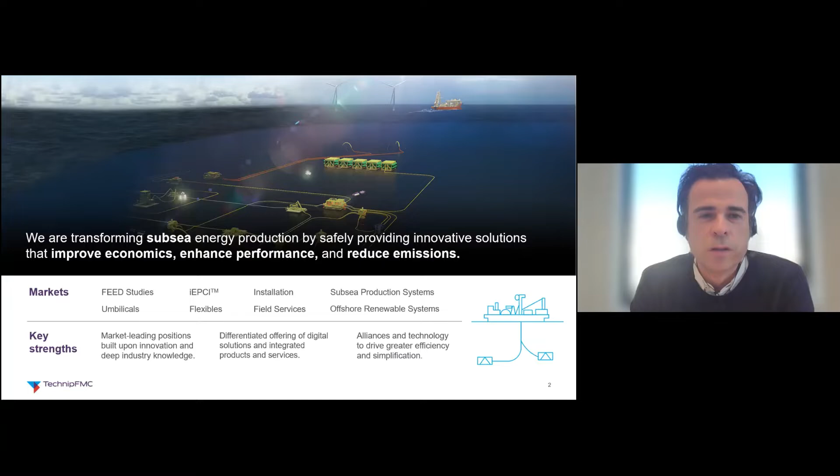TechnipFMC has been operating in subsea production systems and surface systems, providing a number of services to our customers within the oil and gas space, working as an EPCI type of supplier, so engineering, procurement, construction, and installation due to our fleet of vessels, but also performing other specific types of work within FEED studies, especially targeting SURF activities such as umbilicals and flexibles.

As we advance to the energy transition space, the strategy has landed in these 4 pillars that you are able to see here. Basically, we are utilizing our expertise as a system integrator provider, combining all the legacy technology that we have from the past and applying it to the energy transition space. We started with carbon capture and platform electrification, where we partner with our existing clients from oil and gas to decarbonize the offshore or upstream segment.

We also entered offshore wind, where we partner with developers to optimize offshore wind development. Here we play a role within EPCI, front-end engineering, systems engineering integration, offshore construction, and pipeline technology work. We established, for example, a partnership with Magnora to target the Scandinavian licensing and tendering that are ongoing. Also, within wave and tidal, there has been some partnering with Bombora and with Orbital Marine Power in order to capture some interesting developments within this space.

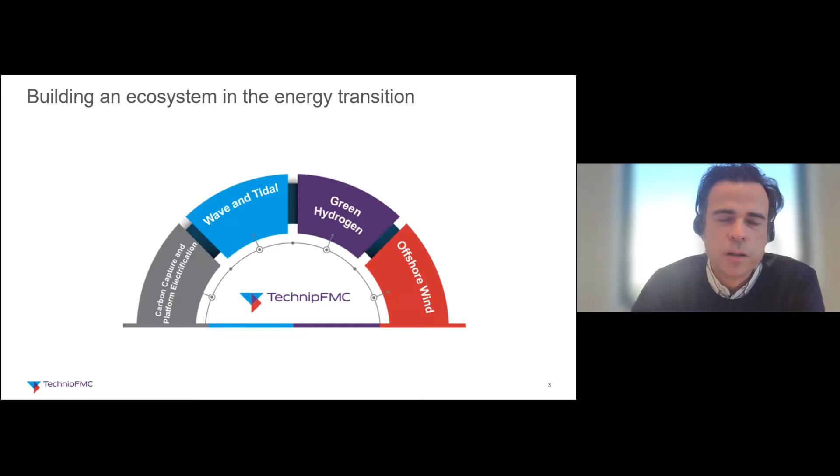But now I'll focus on the last one, green hydrogen, which is the topic for today's discussion. Basically, we are partnering with industry leaders to commercialize and develop green hydrogen through the Deep Purple concept. As most of you already know, hydrogen will play a major role as an enabler for the energy transition, and we need to tackle this enormous need going forward. In the optimistic forecast, it's expected that we will have around 24% need by 2050, and cumulative investment in renewable hydrogen in Europe alone is expected to reach 470 billion euros.

The Deep Purple system was developed by TechnipFMC with clients and key partners, using wind energy to produce and distribute green hydrogen, to provide stable power delivery, to act as local energy production, to tackle the need to reduce carbon emissions, to be competitive with cable power to shore, and to target large-scale offshore renewable hydrogen production.

I'll try to put the video on. Just let me know if there's no sound, please. Hi, Nuno. I am not hearing the sound. Okay. Let me go back then.

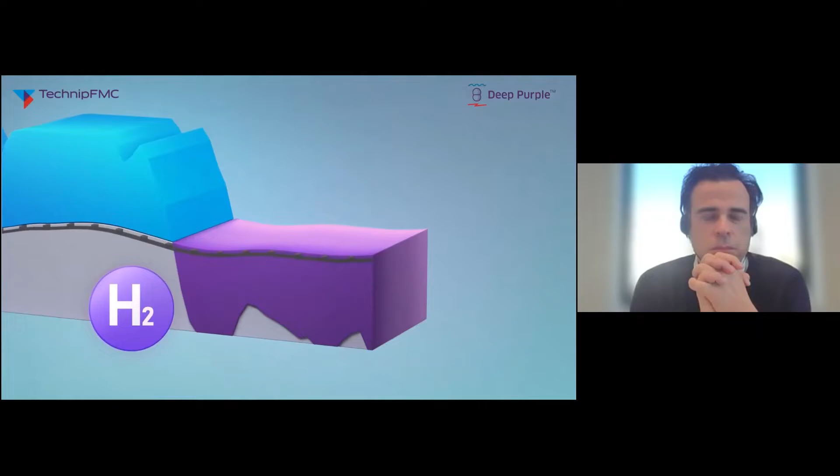The subsea hydrogen storage can be scaled according to need and can store energy volumes much larger than any existing battery. In periods with weak or no wind, hydrogen is converted back to electricity through fuel cells. Hence, electricity will also be delivered to the consumer when there is no wind. The consumer might be offshore oil and gas installations needing renewable electricity to decarbonize the operation, or remote islands not connected to the grid currently, running on fossil fuels.

The Deep Purple system can also deliver hydrogen on demand to hard-to-abate industries like steel and fertilizer plants, and the subsea storage can be used for large-scale, safe storage of hydrogen in harbours for the maritime sector. At the core of Deep Purple is the energy management system. All actions are measured and tracked to optimize the production, storage, grid stability, system utilization, maintenance, and cost of energy.

The complexity of this is high. Understanding all aspects of the system, including weather, load demands, availability targets, and equipment characteristics, is fundamental, and managing it all is required in order to deliver stable energy at the lowest cost.

So to recap here a bit, the Deep Purple concept and process. Offshore wind is intermittent in nature, and in many cases, the user needs a stable power supply for the decarbonization of their operations. So by combining the offshore wind with the hydrogen, we actually use the hydrogen as a buffer to both store and to stabilize the wind production. In the periods where we have good wind conditions, the electricity created from the wind turbines is delivered directly to the consumer. Excess power is used to produce hydrogen.

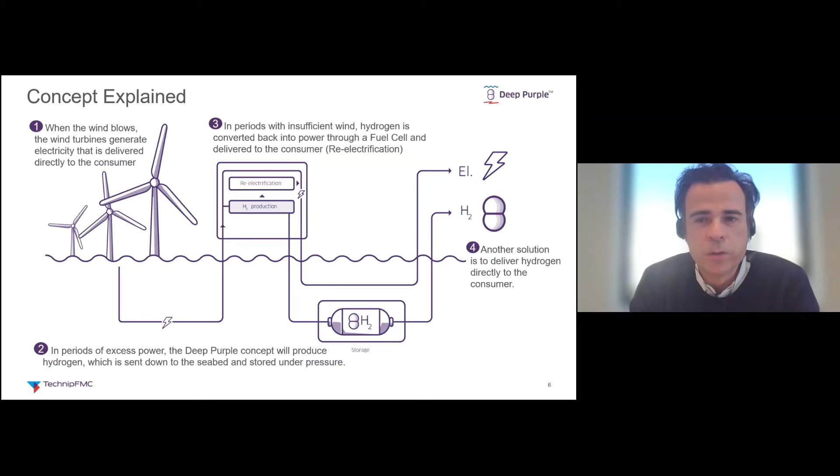Like mentioned in the video, for the potential markets that we are looking at, we see this span of ocean space. On one side, we have the off-grid energy systems, while on the other side, the large-scale hydrogen production and storage. In the off-grid energy systems, delivering renewable and stable power to traditional energy installations and remote islands. This market opportunity is primarily driven by the need for decarbonization, for example, replacing gas turbines and diesel generator sets. By combining offshore wind and hydrogen, we can enable 80 to 100% reduction in emissions.

For the offshore green hydrogen production and subsea infrastructure for coastal application, the offshore hydrogen production will enable the harvesting of wind resources far from shore, where the transport of electricity could be challenging. The hydrogen pipeline offers up to 10 times more capacity for energy transfer compared to a power cable, and our subsea storage system can be used to store large amounts of hydrogen.

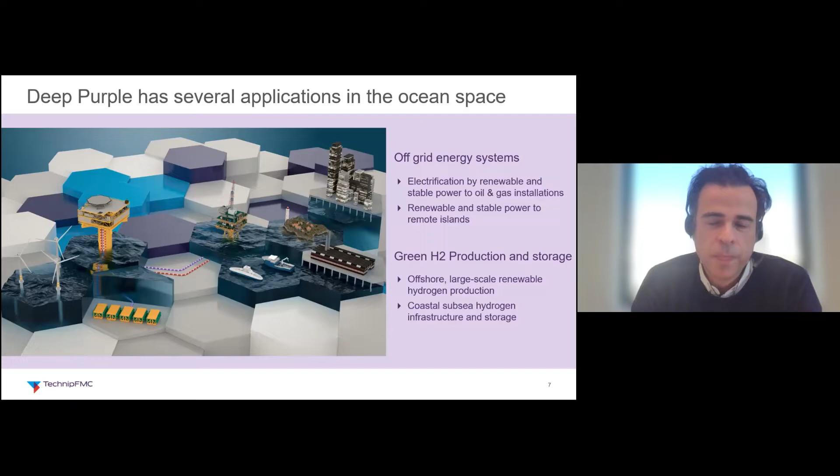For the current ongoing applications of Deep Purple, we started this year on the Deep Purple pilot, and it will continue over the next 2 years, where the project consortium will design, build, and test a physical land-based pilot at TechnipFMC's Norwegian headquarters in Kongsberg. The pilot will include an electrolyzer, hydrogen storage, a fuel cell, energy control system, as well as the development and testing of an advanced control and advisory system and dynamic process simulator.

The pilot will allow the consortium partners to ensure energy efficiency and autonomous operation offshore, as well as prepare the system for large-scale offshore commercial use. This has been the object of governmental funding, and the partners are described here, including Vattenfall, Repsol, Nel, ABB, DNV and other Norwegian partners.

Other ongoing initiative is the floating power plant, where we are working with this Danish company to develop a combined floating wave and hydrogen energy storage system. So it's a self-contained floating power station that will use hydrogen process technology to manage wind wave intermittency. So this is a decentralized type of concept, a standalone, that could capture the full system, going from the production to the storage part of it.

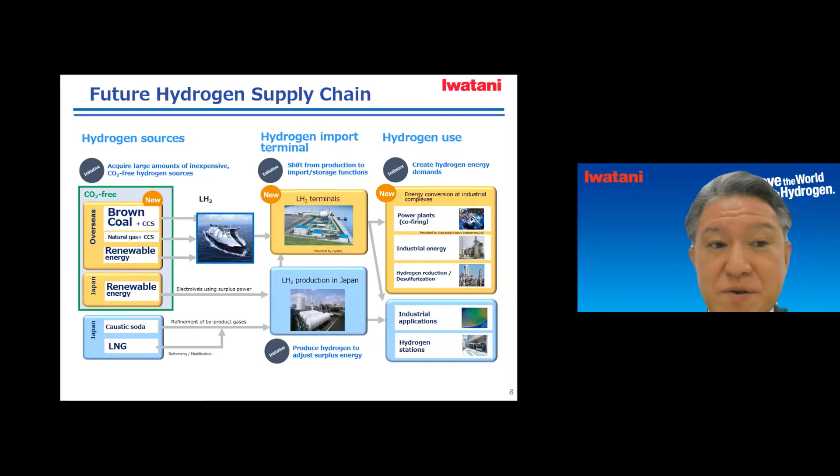So this is what we are going to do from next year, for 5 to 10 years. Currently, we are producing hydrogen from fossil fuels like LNG, but we are going to build a global supply chain of CO2-free hydrogen sources.

Currently, this is a very small-scale demonstration project funded by the Japanese government. Iwatani and Kawasaki, also Marubeni, got together for the small-scale demonstration. We have already built the special tanker ship to import the hydrogen from Australia to Japan. We also set up the tanks in Kobe in Japan for storage of the liquefied hydrogen.

And recently, Iwatani, Kawasaki Heavy and ENEOS were awarded a much larger scale demonstration for a liquefied hydrogen supply chain. The investment for the coming 10 years will be about $3 billion, and the Japanese government will support us with $2.2 billion. What we should do is build a larger scale development of liquefied hydrogen importing from overseas countries.

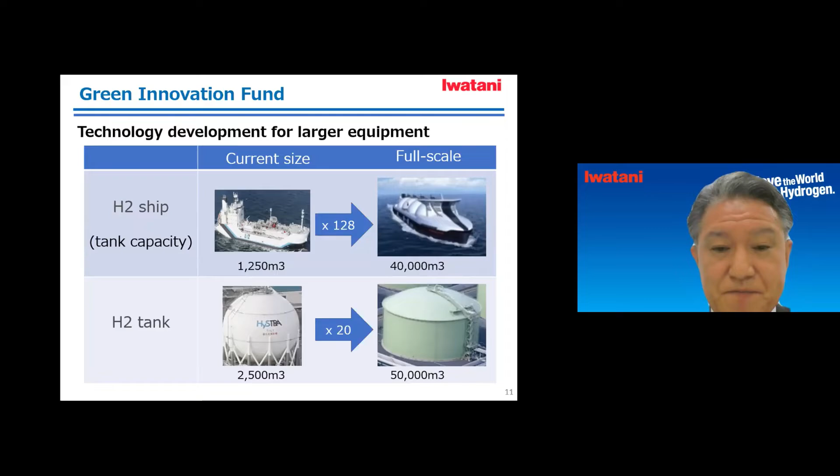Currently, as I said, we have a small-scale tanker, but for the full-scale demonstration, we need a special tanker 128 times larger than the current one. And also the storage tank in Japan should be 20 times larger than the current size. So we are now demonstrating importing from Australia, but we are going to increase the opportunity to build the global supply chain, hopefully from Portugal as well.

This is just for your reference. We are currently designing fuel cell ships, which will be operated for the Osaka Kansai Expo in 2025. So Iwatani, as a leading supplier in Japan, tries to create more demand for hydrogen. Also, we would like to build the global hydrogen supply chain, hopefully from Portugal. We expect offshore hydrogen production in Portugal, and hopefully we would like to explore more opportunities to import hydrogen from Portugal to Japan in the future.

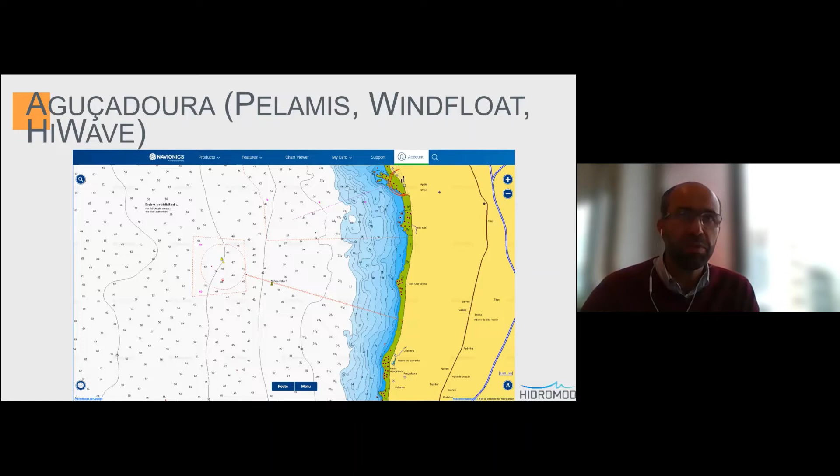I've gathered a few things, mostly based on these two sites that were already referred in some of the presentations. So the site of Viana do Castelo, where the WindFloat Atlantic is based, and the site of Aguçadora, where now we will have the HiWave from CorPower, but previously there were other projects on this site. So our main concern is how do we get the right data to the right people in the right time, to the people that are involved in these sites. How do they get their data? How do we share data to other people that want to study opportunities in these sites? So how do we do this?

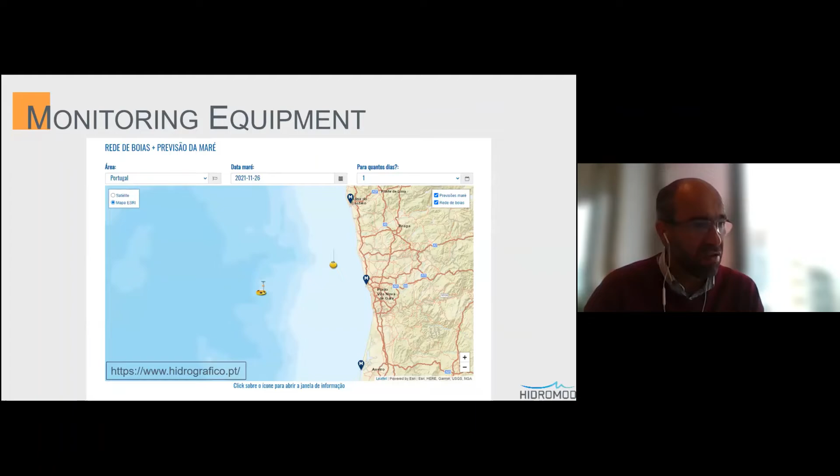There are a number of equipment there, and there has been a number of equipment in that area for a few years now, and this specific equipment I'm showing here is there due to the Instituto Hidrográfico. So they maintain a host of equipments there in the sea and on land. So tide gauges, wave buoys, and it is very important that this data gets through to the people that need it.

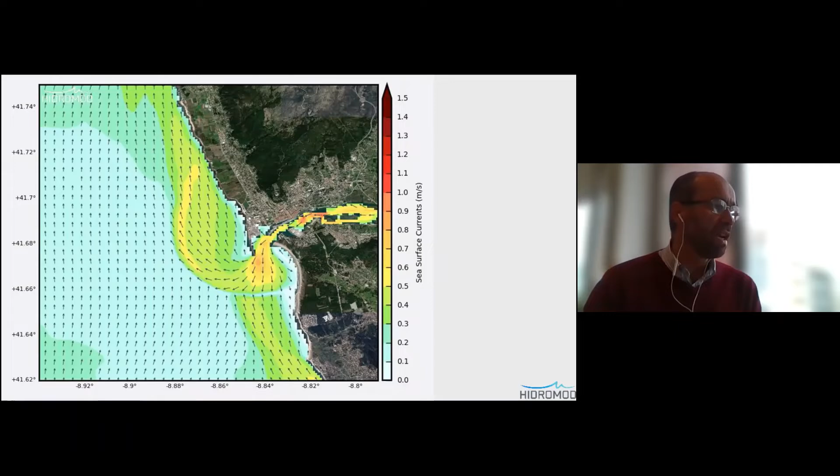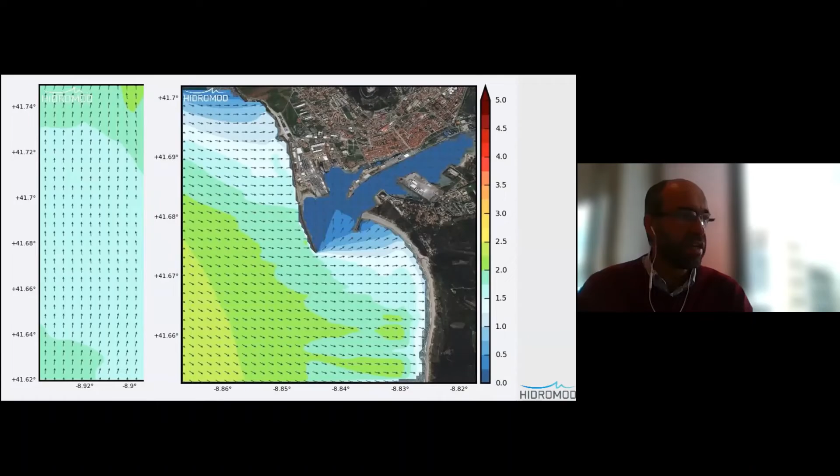But there is other information. These are numerical models we have at the company. We have numerical models running for the site. This is Viana do Castelo, so this is a current hydrodynamic model operational for the site of Viana do Castelo. It has the ocean influence and the river flow influence, and so it is permanently calculating the sea level and the currents, and this is similarly a wave model. So it is permanently calculating the waves for the area of Viana do Castelo, and there are meteorological models. So this is a model we use for wind also in that area. It's a larger area in the north of Portugal. So these are other data sources for the area of those two test sites.

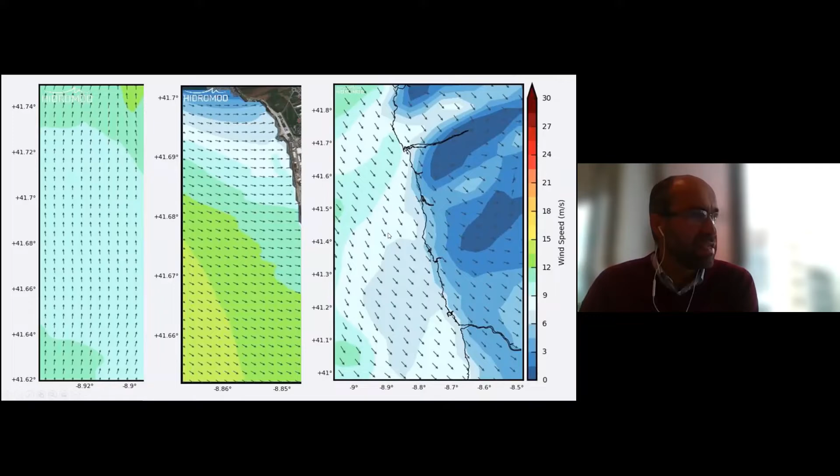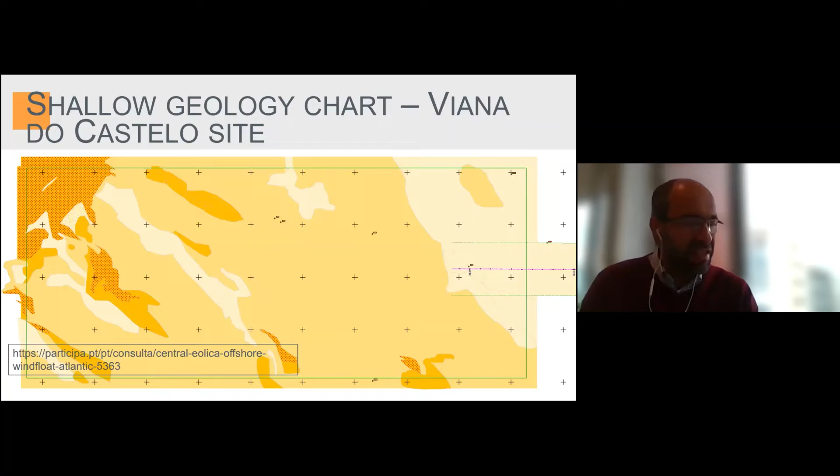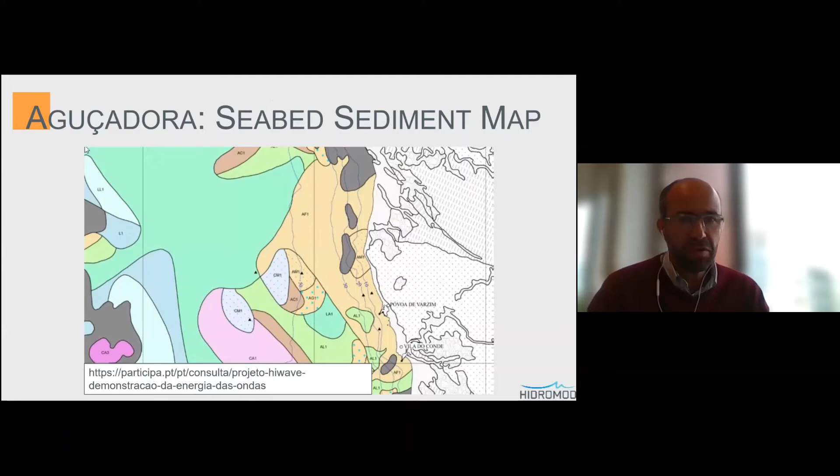This is another example. This is the data that exists for the site of Viana do Castelo. This is from the environmental assessment from the public consultation. So this data is there. The shallow geology chart, for instance, for the site of Viana do Castelo, is from the public consultation, and this is also some of the data that is quite needed when planning this kind of projects. Similarly, for the site of Aguçadora, there are some sediment charts, and this is also from the public consultation, the assessment by the public. And so what we want to do is to make this data as available as possible to different audiences.

And for this, within a number of European projects where we have participated, some of them with WavEC, we've set up a data platform for different test sites in Europe, also those in Portugal, of course, where we have data that is relevant for the projects in these test centers. So this is acoustic data, data on birds, on sea mammals, all that kind of stuff that is important, for instance, for the environmental assessment of these projects. And this is freely available over the internet.

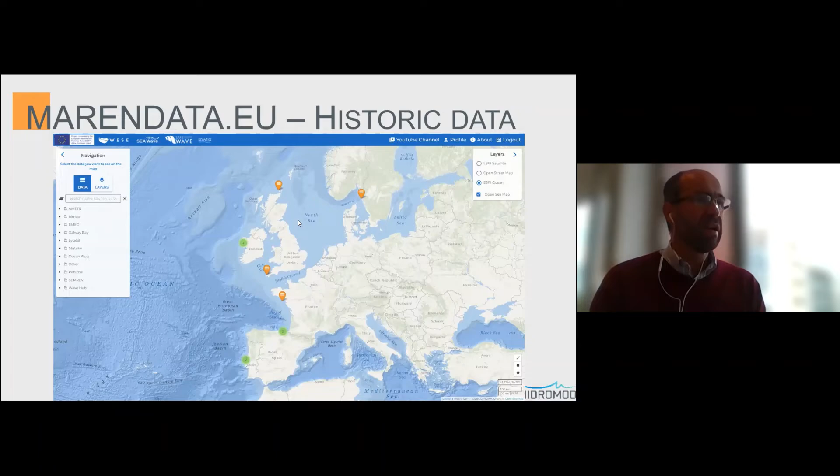It's a way to channel the information to people that may need it. We have also in the company developed the thing that we call our Swiss knife, which is a software that enables us to put historic and operational data, operational meaning nowcast and forecast for the next few days, which has different components. It has the user interface, security layer, and then it manages data services. It links with the data acquisition, a data lake, a scheduler.

So it's a quite sophisticated tool that enables us to manage data that is measured on site, satellite data, numerical models, and then direct this to people as they need it for different operations. Of course, marine energy related operations are one of them. We have existing services right now. I've shown one of them, that MARENDATA platform, and we also provide based on these tools.

We also provide metocean historic and operational, so nowcast and forecast data for the ports of Leixões, Viana do Castelo, Aveiro, Setúbal, this for about 10 years now. So they've been quite happy with these services we've been providing them. And also for aquacultures, water utilities, and other industries. And well, I tried to keep this as short as possible, and that's it.

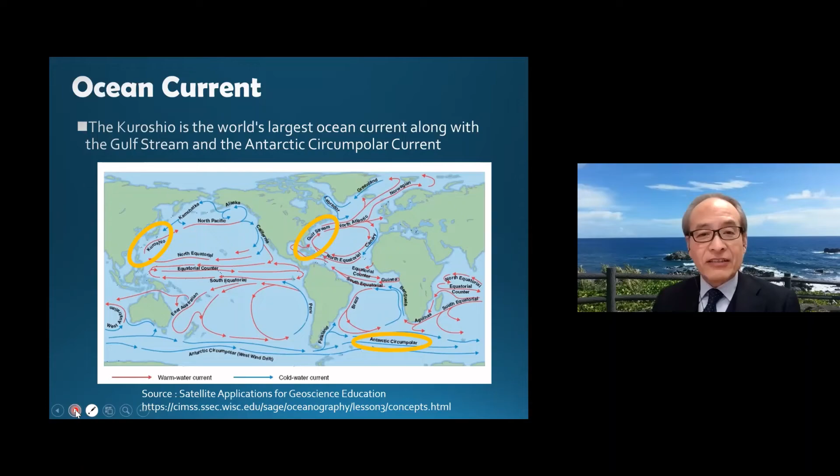Okay, the first topic is ocean current. As you know, in the Northern Hemisphere, there are very large clockwise currents. And the current is enhanced at the East Coast because of the Coriolis force. Therefore, Japan gets a very large and strong ocean current. And another opportunity is that Japan has 417 populated islands, and we have to supply the electricity to maintain these populations. Therefore, we need renewable energy sources near these small islands. So that's the main motivation for ocean current turbines.

But we have technology challenges. The first challenge is water depth, which is 100 meters to 1,000 meters. And the other challenge is slow current speed. Actually, the maximum ocean current speed is 2.5 meters per second, which is smaller than the tidal current speed. And therefore, we have to develop the floating type and large turbine diameters.

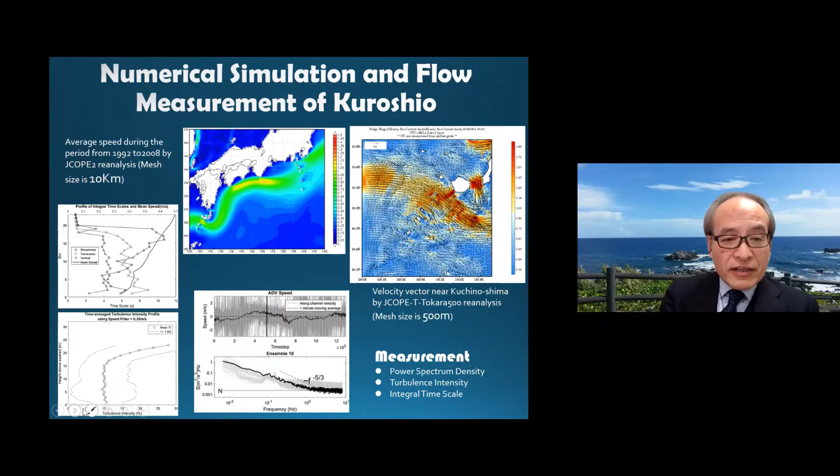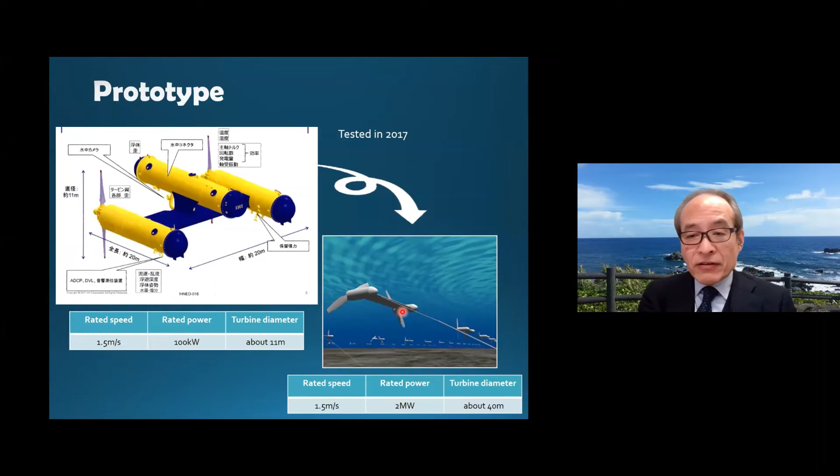This is the size of the prototype. The prototype output is 100 kilowatts, and it has about 11 meter diameter turbines. And this is the final goal. The rated power will be 2 megawatts, and the turbine diameter will be about 40 meters.

Okay, let me move on to the second topic. That is the social acceptance of marine renewable energies, which is very important as the initial stage of deploying marine renewable energies.

As you know, we have traditionally fishery industry as well as surface transportation. So utilizing the marine space in Japan is a little bit complicated because of many stakeholders. It is very important to have coexistence strategies.

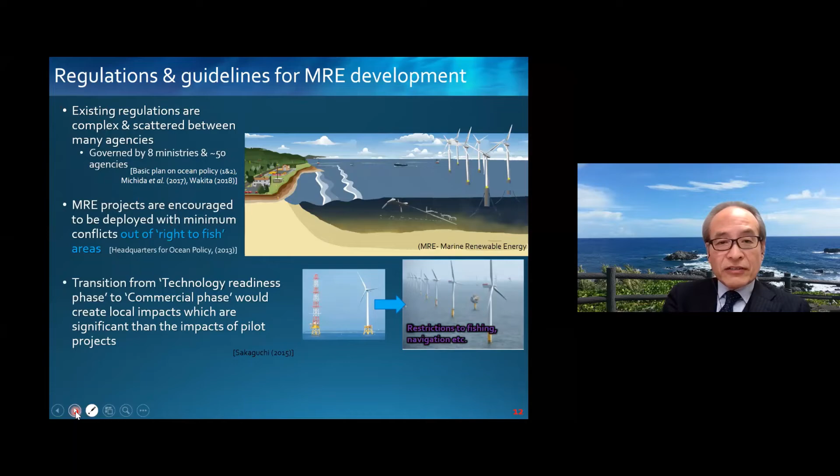We propose several coexistence strategies. The first one is sharing real-time in-situ oceanographic information from marine renewable energy devices, which is proposed by our laboratory. The second one is using MRE devices' foundations as fishery support structures and as artificial reefs.

This feature was questioned by several audience members in this symposium. The third one is co-location with commercial and leisure activities such as aquaculture. The fourth one is sharing generated electricity for the local community to improve other local industries. The fifth one is utilization of regional resources for construction and operation of the power farm.

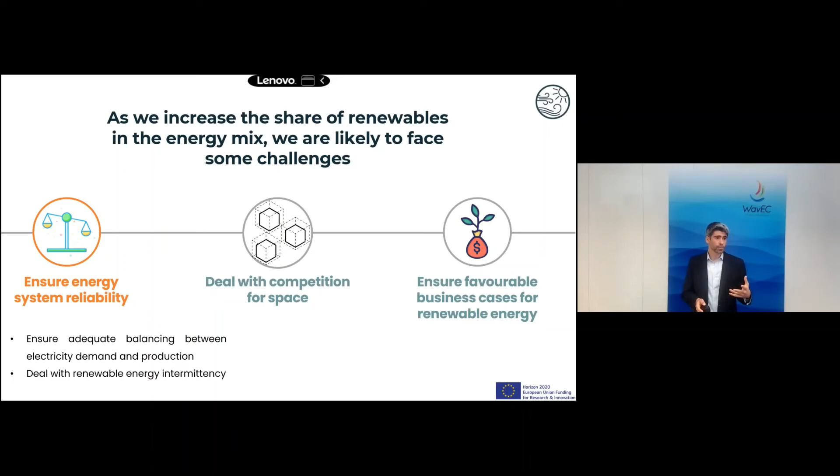And these challenges are aggravated if we only focus on a couple of mature technologies, just like offshore wind. And these challenges, the first one is related to ensuring energy system reliability. Well, this is something that we always hear about, which is related to intermittency of renewable energy. And the point is we need to produce electricity when there is a demand for it, and we have to always meet these factors.

The second is related to dealing with competition for space. Now, as we moved offshore, obviously there is less competition for space than onshore. Onshore, for example, for wind, the best sites are already being used, but still offshore, we still face some competing uses, namely aquaculture, shipping, fishing, and other environmental exclusion zones as such.

Also, there is the requirement to ensure that there are sufficient inter-device distances. So this means that for wind turbines, devices must be separated sufficiently in order to not reduce the power generation of the downstream turbines. And as turbines or devices increase, so does the need to increase the distance between devices.

And thirdly, and this challenge is actually related with the other two, is the need to obviously lower the cost of energy generation. And some technology developers have been achieving great results in this sense. But we also will have to be able to ensure that renewable energy production is still an attractive business case in the face of curtailment during peak wind times, and also dealing with the interpark effects or shadowing effects that I just mentioned before.

Now, what if we combine different sources of offshore renewable energy? Could this be a solution? Well, if we did so, first of all, diversifying the energy mix and introducing coupled technologies such as solar, wind, and waves could lead to a more reliable and low-cost energy system.

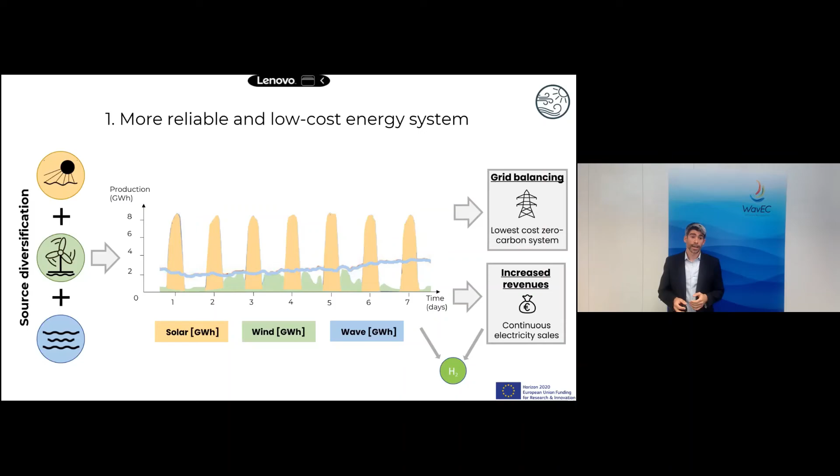Finally, this could also be combined with hydrogen, which is one of the main themes of this seminar today. As it was mentioned, hydrogen could be coupled in the system, producing during the times where the electricity demand is low, capturing the renewable energy that is being produced, and using it to produce hydrogen, either onshore or offshore, in order to sell it later at a revenue.

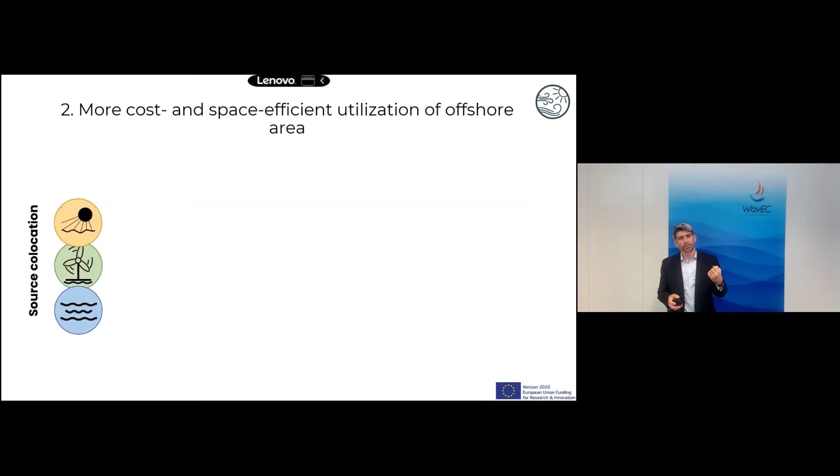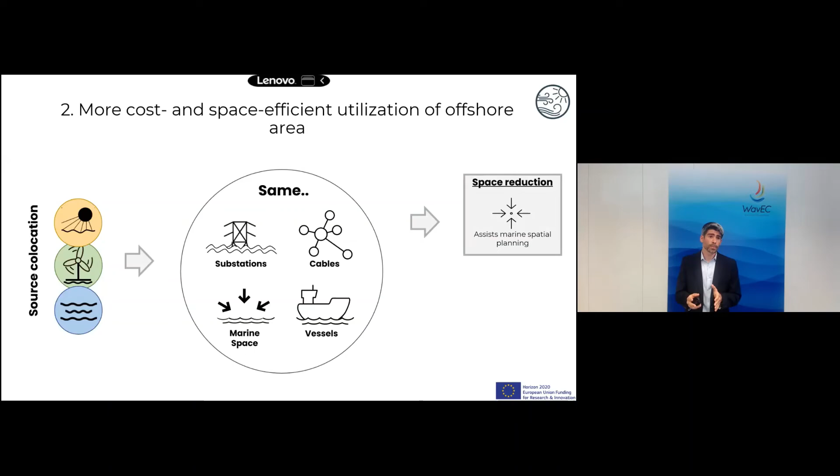Secondly, by co-locating different sources of energy, again sun, wind, and waves, we could achieve a more cost and space-efficient utilization of the offshore area. This is because there is a potential to use the same substations, the same cables, the marine space, and share vessels. Sharing all this infrastructure has the potential to reduce the costs. So we'll be reducing not only the total space needed, but also the OPEX and the CAPEX related to the project.

Now, everything that I just mentioned is the motivation behind EU-SCORES, which was already briefly mentioned in other presentations. EU-SCORES is a 4-year European funded project that just started in September. It will last until October 25. It has a total budget of 46 million euros. And the objective is to demonstrate the complementarity of different offshore renewable energy sources, wave, wind, and solar, demonstrate the technical, economic, and also environmental potential of multi-source offshore renewable energy farms, and finally accelerate the commercial deployment of wave and floating solar PV energy projects.

We'll have 2 pilot demonstrations, one in Belgium, which will be a floating solar PV plus an existing fixed offshore wind park. And then we'll have a demonstration in Portugal, floating wave with floating offshore wind, the floating wave being developed by CorPower. The consortium is a cross-country consortium. We have 12 European countries, 17 partners, 8 scale-up advisors, all coordinated by DMEC.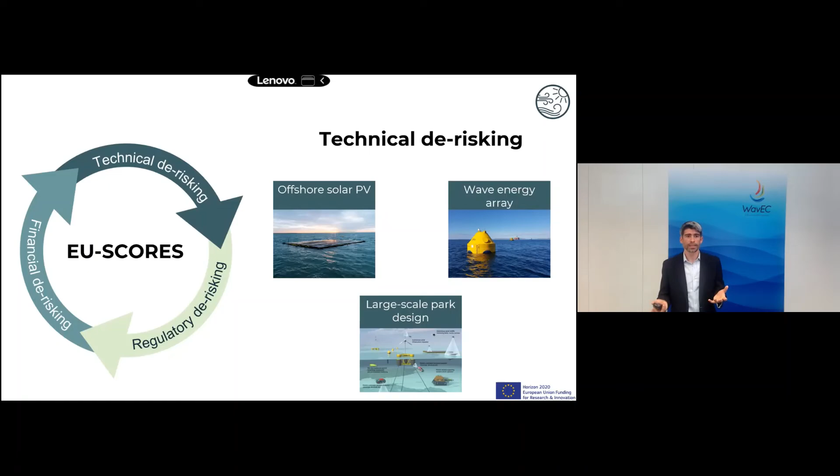But throughout this project, what we expect is to do essentially the de-risking of the technologies. So we'll be achieving technical de-risking, regulatory de-risking, and financial de-risking. The technical de-risking is firstly demonstrating the technologies offshore solar PV and wave energy, which are a little bit less mature, but also focusing on large-scale design.

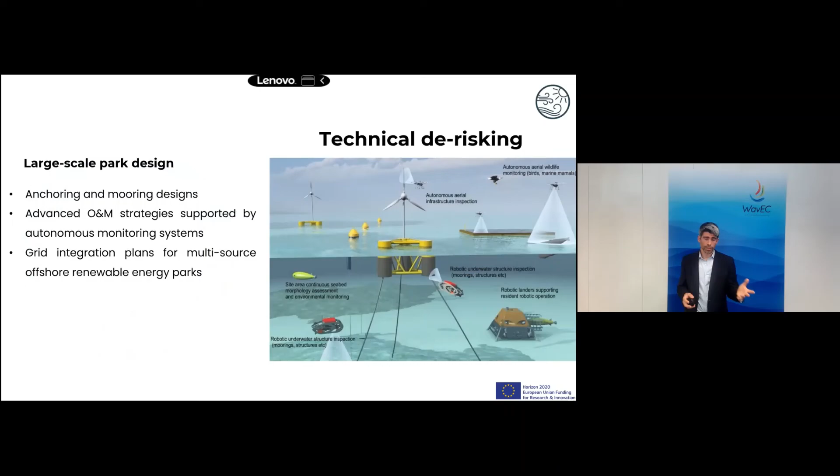So in the large-scale design, we'll essentially focus on how this could be scaled in a multi-source farm, and focusing on anchoring and mooring designs, focusing on advanced O&M strategies, namely using autonomous monitoring systems, and also some grid integration plans for multi-source parks.

The financial de-risking will be focusing on learning rates, cost reduction in different scenarios, trying to evaluate exactly the business case for different regions in the EU, because in different regions you have different legal frameworks that you have to take into consideration. And then everything will be evaluated and financially assessed in the end.

And last but not least, we'll have the regulatory de-risking, and this will be achieved through stakeholder gathering events, in which I hope to see you all. We'll do resource and energy system assessments, and finally, in the end, the objective is also to come up with policy and regulation advice or documents detailing this advice that we found out in the course of the project.